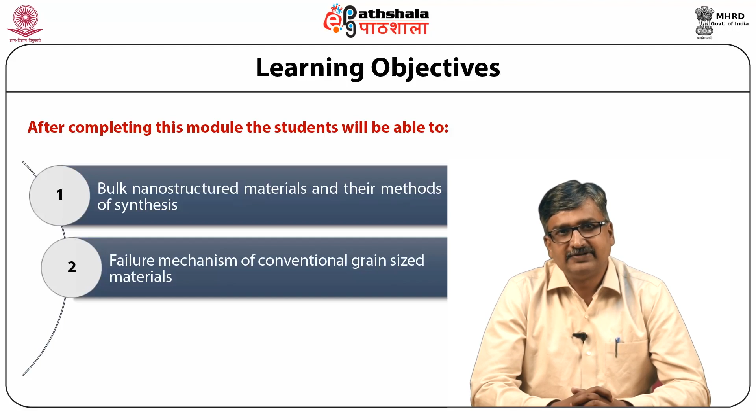Today we are going to discuss the module titled Basic Properties of Nanoparticles Part 7 under the paper Nanoscience and Technology 2. After completing this module, the student will be able to learn about bulk nanostructure material and their method of synthesis. You will also be able to learn the failure mechanism of conventional grain size material and the mechanical and electrical properties of bulk nanostructure material.

Bulk nanostructure material is defined as bulk solid with a nanoscale or partially nanoscale microstructure. This category of nanostructure material has historical roots going back many decades but has a relatively recent focus due to new discoveries of unique properties of some nanoscale materials.

Early in the century, when microstructure was revealed primarily with the optical microscope, it was recognized that refined microstructures, for example small grain size, often provide attractive properties such as increased strength and toughness in structural materials. A classic example of properties enhanced due to refined microstructure with features too small to resolve with the optical microscope was age hardening of aluminum alloys.

This phenomenon, discovered by Alfred Wilm in 1906, was essentially explained by Merica, Waltenberg and Scott in 1919, and by Mehl and Kohn in 1983. The microstructure features responsible were first inferred by X-ray study of Guinier and Preston in 1938. With the advent of transmission electron microscope and sophisticated X-ray diffraction methods, it is now known that fine precipitates responsible for age hardening in aluminum 4% copper alloy are, for example, clusters of copper atoms - Guinier-Preston (GP) zones - and the meta-stable partially coherent theta prime precipitate, which was studied by Silcock et al. in 1953-54, and by Cohen in 1992.

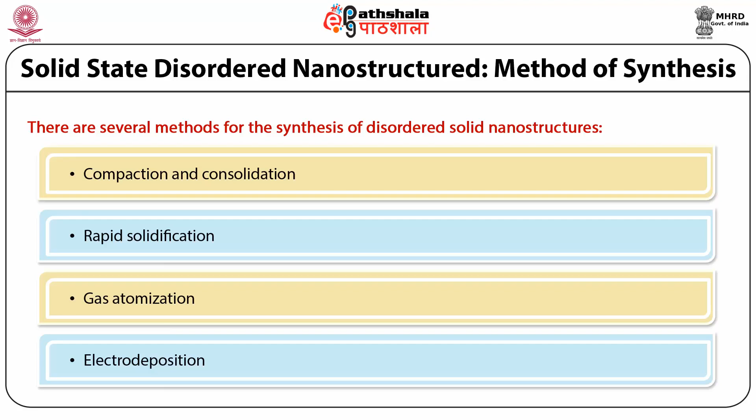The first one is compaction and consolidation. The second one is rapid solidification. The third one is gas atomization, and the fourth one is electrodeposition. These methods will be discussed one by one in the coming slides.

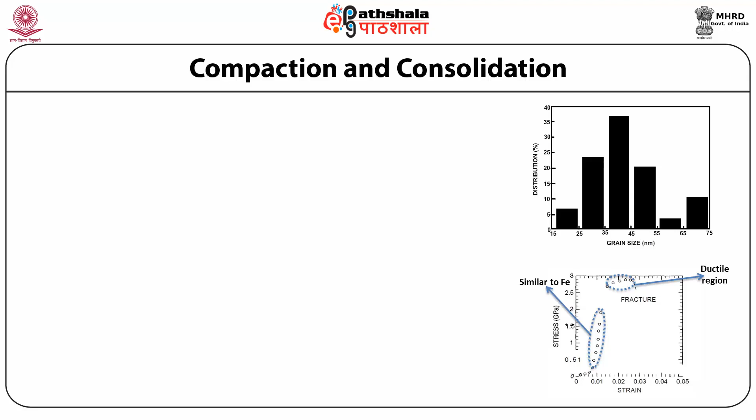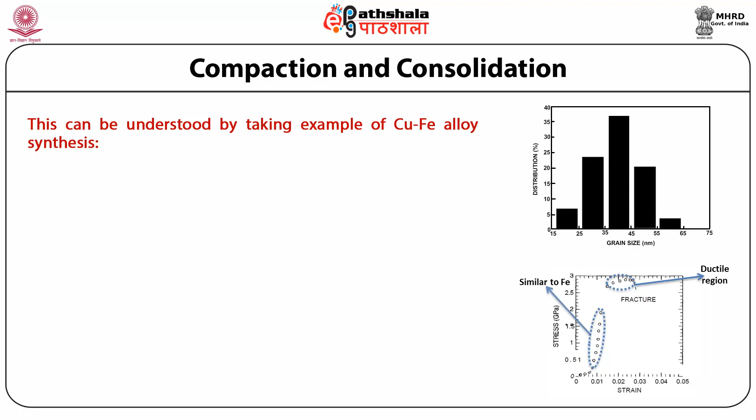Let us discuss the first method of synthesis, which is compaction and consolidation. Compaction and consolidation is one method for the synthesis of disordered bulk nanostructures. As an example of such a process, let us consider how nanostructure copper-iron alloys are made, using mixtures of iron and copper powder having the composition of your need.

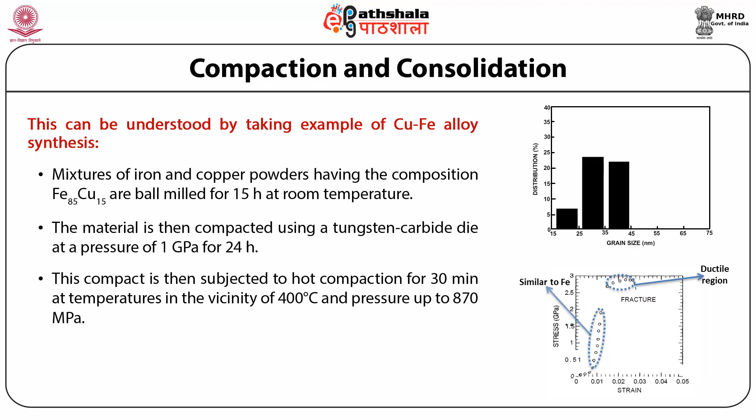For example, here it is: Fe85Cu15, ball milled. Ball milling is a technique done for 15 hours at room temperature. The material is then compacted using a tungsten carbide die at a pressure of 1 gigapascal for 24 hours. This compact is then subjected to hot compaction for 30 minutes at a temperature around 400 degrees Celsius and a pressure up to 870 megapascal. The final density of the compact is around 99% of the maximum possible density.

The figure presents the distribution of grain size in the material, showing that it consists of nanoparticles ranging in size from 20 to 70 nanometers, with the largest number of particles having a size of 40 nanometers.

The figure shows a stress-strain curve for this case. Its Young's modulus, which is the slope of the curve in the linear region, is similar to that of conventional iron. The deviation from linearity in the stress-strain curve shows there is a ductile region before fracture where the material displays elongation. The data shows that fracture occurs at 2.8 gigapascal, about 5 times the fracture stress of iron with larger grain size ranging from 50 to 150 micrometers.

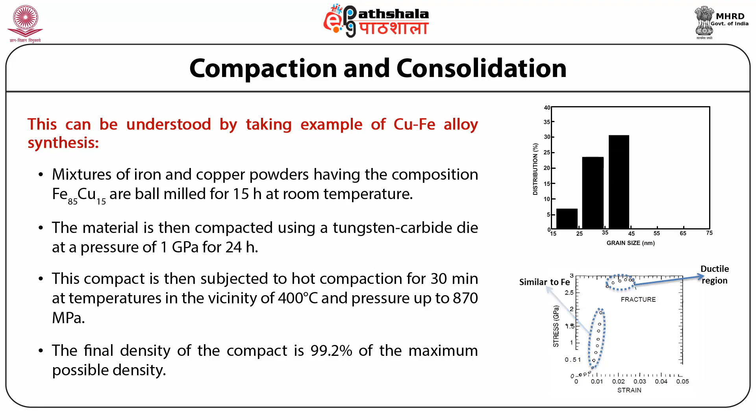Significant modification of mechanical properties of disordered bulk materials having nano-size grain is one of the most important properties of such materials. Making materials with nano-size grain has the potential to provide a significant increase in yield stress and has many useful applications, such as stronger material for automobile bodies.

The parameters that control the nanostructure of the material are nozzle size, nozzle-to-drum distance, melt ejection pressure, and spin rate of rotation of the metal drum.

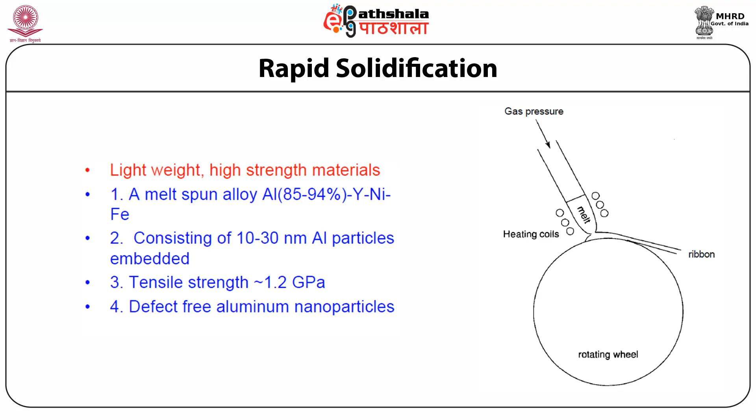The need for lightweight, high-strength material has led to the development of 85 to 94% aluminum alloys with other metals such as yttrium, nickel, and iron, made by this method. A melt-spun alloy of aluminum, yttrium, nickel, and iron, consisting of 10 to 30 nanometer aluminum particles embedded in an amorphous matrix, can have a tensile strength in excess of 1.2 gigapascal. This high value is attributed to the presence of defect-free aluminum nanoparticles.

Nanostructured material can also be made by electrodeposition. For example, a sheet of nanostructured copper can be fabricated by putting two electrodes in an electrolyte of copper sulfate and applying a voltage between them. A layer of nanostructured copper will be deposited on the negative titanium electrode. A sheet of copper a millimeter thick can be made by this process, having an average grain size of 27 nanometers and enhanced yield strength of 119 megapascal.

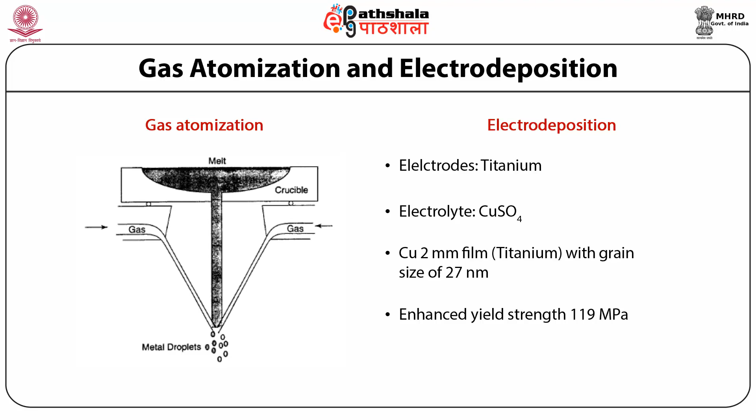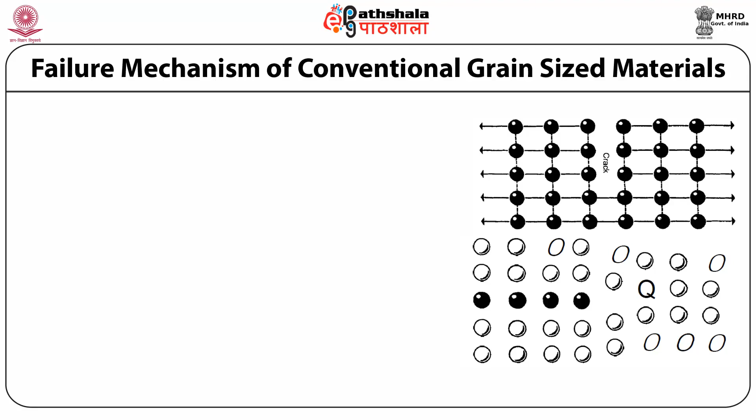The failure mechanism of conventional grain-sized material: in order to understand how nano-sized grains affect the bulk structure of materials, it is necessary to discuss how conventional grain-sized materials fail mechanically. A brittle material fractures before it undergoes irreversible elongation.

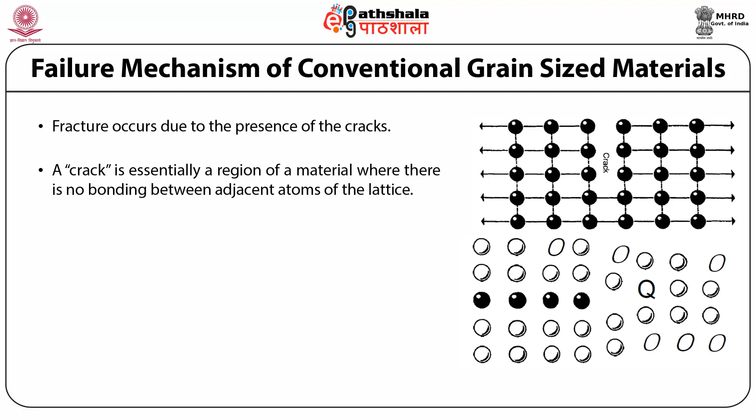Fracture occurs because of the existence of cracks in the material. The figure shows an example of a crack in a two-dimensional lattice. A crack is essentially a region of a material where there is no bonding between adjacent atoms of the lattice. If such a material is subjected to tension, the crack interrupts the flow of stress. The stress accumulates at the bond at the end of the crack, making the stress at that bond very high, perhaps exceeding the bond strength. This results in the breaking of the bond at the end of the crack and the lengthening of the crack.

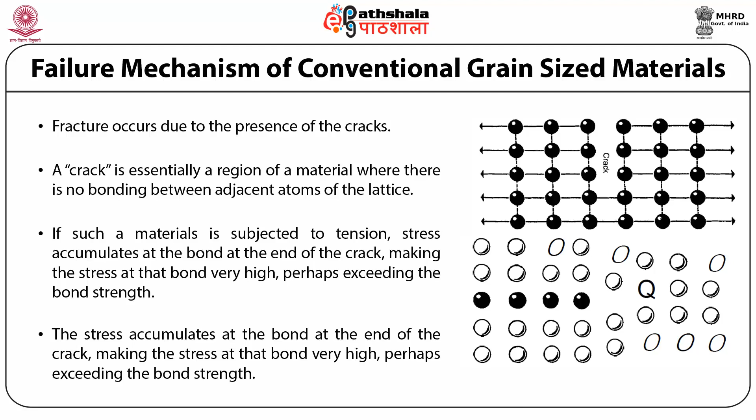Stress builds up on the next bond at the bottom of the crack, and it breaks. This process of crack propagation continues until eventually the material separates at the crack. A crack provides a mechanism whereby a weak external force can break strong bonds one by one.

In this region, the material is irreversibly elongated before fracture. When the stress is removed after the brittle to ductile transition, the material does not return to its original length.

The transition to ductile is a result of another kind of defect in the lattice called a dislocation. The figures illustrate an edge dislocation in a two-dimensional lattice. There are also other kinds of dislocation, such as screw dislocation.

Dislocations are essentially regions where lattice deviation from a regular structure extends over a large number of lattice spacings. Unlike cracks, the atoms in this region of the dislocation are bonded to each other, but the bonds are weaker than in the normal region.

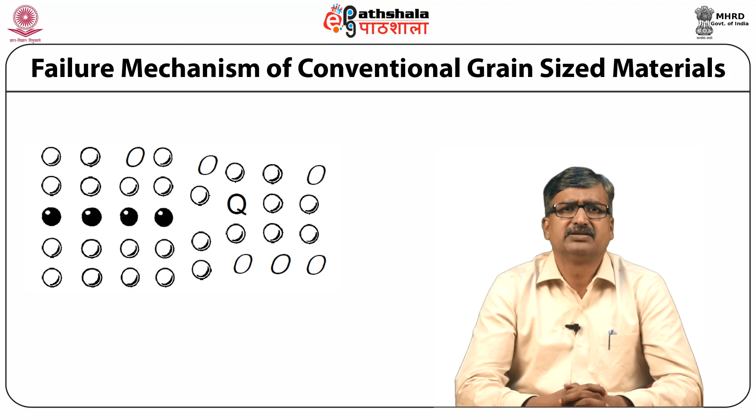Now let's discuss mechanical properties. The intrinsic elastic modulus of nanostructured material is essentially the same as that of the bulk material having micrometer-size grains, until the grain size becomes very small, less than 5 nanometers.

Young's modulus is the factor relating stress and strain. It is the slope of the stress-strain curve in the linear region. The larger the value of Young's modulus, the less elastic the material.

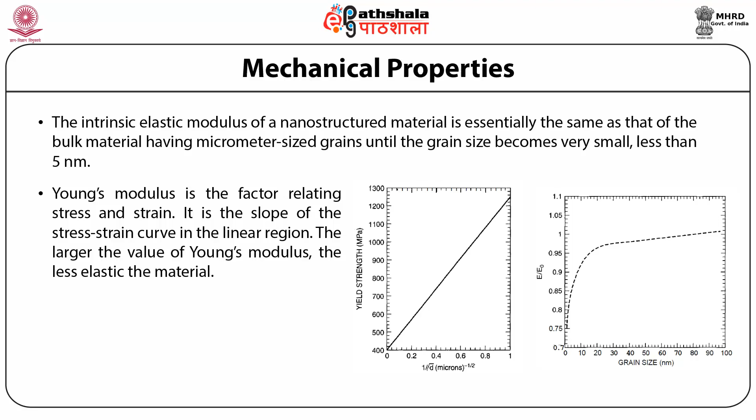In the figure, we plot the ratio of Young's modulus E in nano-grained iron to its value in conventional grain size iron, E0, as a function of grain size. We see from the figure that below 20 nanometers, Young's modulus begins to decrease from its value in conventional grain size material.

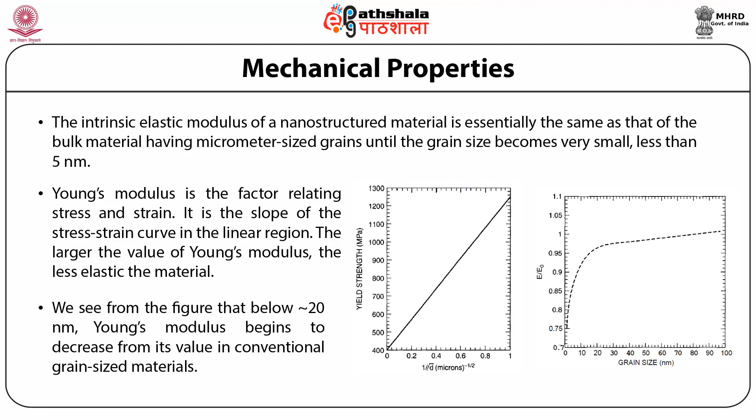The yield strength sigma_y of a conventional grain size material is related to the grain size by a Hall-Petch relation: sigma_y equals sigma_0 plus k times d to the power minus one half, where sigma_0 is the frictional stress opposing dislocation movement, k is a constant, and d is the grain size in micrometers.

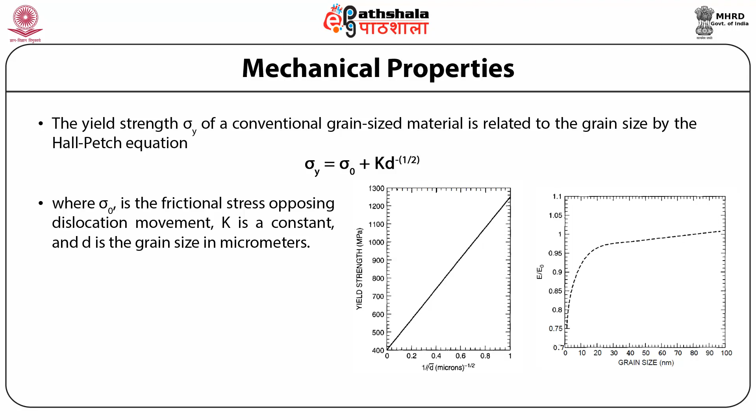Hardness can also be described by a similar equation. The figure plots the measured yield strength of an iron-cobalt alloy as a function of d to the power minus one half, showing the linear behavior predicted by the equation.

Assuming the equation is valid for nano-size grains, a bulk material having a 50 nanometer grain size would have a yield strength of around 4.14 gigapascals.

The reason for the increase in yield strength with smaller grain size is that material having smaller grains has more grain boundaries, blocking dislocation movement.

Deviations from Hall-Petch behavior have been observed for materials made of particles less than 20 nanometers in size. The deviation involves either no dependence on particle size (zero slope) or a decrease in yield strength with particle size (negative slope).

It is believed that conventional dislocation-based deformation is not possible in bulk nanostructured materials with size less than 30 nanometers, because mobile dislocations are unlikely to occur. Examination of small-grain bulk nanomaterials by transmission electron microscopy during deformation does not show any evidence for mobile dislocations.

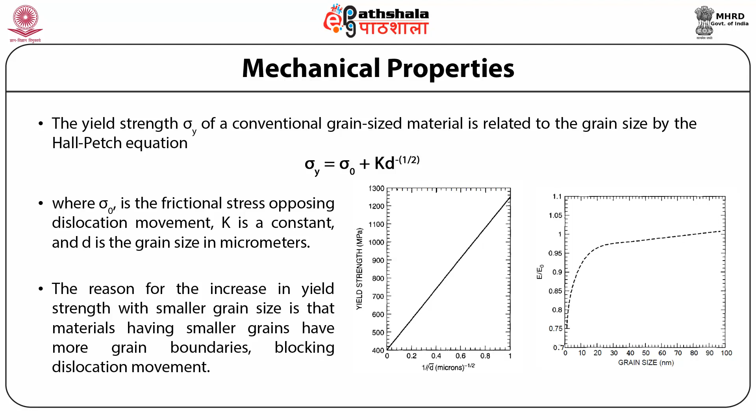Another kind of bulk nanostructure consists of periodic layers of nanomaterial of different thickness, such as alternating layers of TiN and NbN. These layered materials are fabricated by various vapor phase methods such as sputter deposition and chemical vapor phase deposition. They can also be made by electrochemical deposition, discussed earlier.

These materials have very large interface area densities, meaning the density of atoms on the planar boundary between two layers is very high. For example, a square centimeter of a 1 micrometer thick multilayer film with layers of 2 nanometer thickness has an interface area of 1000 centimeter square. Since the material has a density of about 6.5 gram per centimeter cube, the interface area density is 154 meter square per gram, comparable to that of a typical heterogeneous catalyst.

The interfacial regions have a strong influence on the properties of these materials. These layered materials have very high hardness, which depends on the thickness of the layer, and good wear resistance.

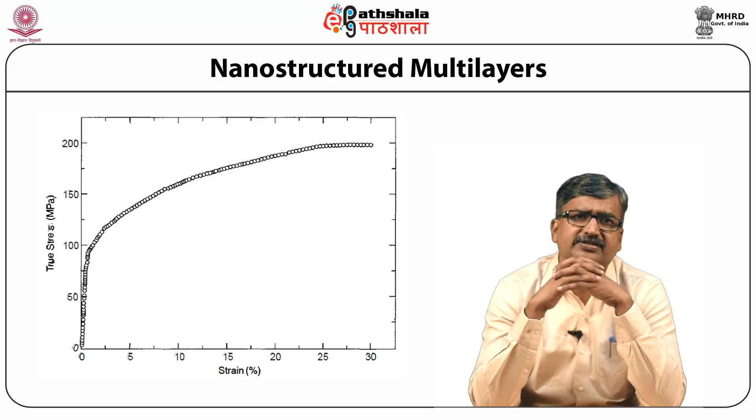Let us discuss the electrical properties in this case. For a collection of nanoparticles to be a conducting material, the particles must be in electrical contact. One form of bulk nanostructure material that is conducting consists of gold nanoparticles connected to each other by long molecules.

This network is made by taking gold nanoparticles in the form of an aerosol spray and subjecting them to a fine mist of thiol, such as dodecanethiol, RSH, where R is C12H25. These alkyl thiols have an end group SH that can attach to a metal, and a methylene chain 8 to 12 units long that provides steric repulsion between the chains. The chain-like molecules radiate out from the particle. The encapsulated gold particles are stable in aliphatic solvents such as hexane.

However, the addition of a small amount of dithiol to the solution causes the formation of a three-dimensional cluster network that precipitates out as a solid. Clusters of the particles can also be deposited on a flat surface once the colloidal solution of encapsulated nanoparticles has been formed. In-plane electronic conduction has been measured in a two-dimensional array of 5 nanometer gold nanoparticles connected or linked to each other by conjugated organic molecules.

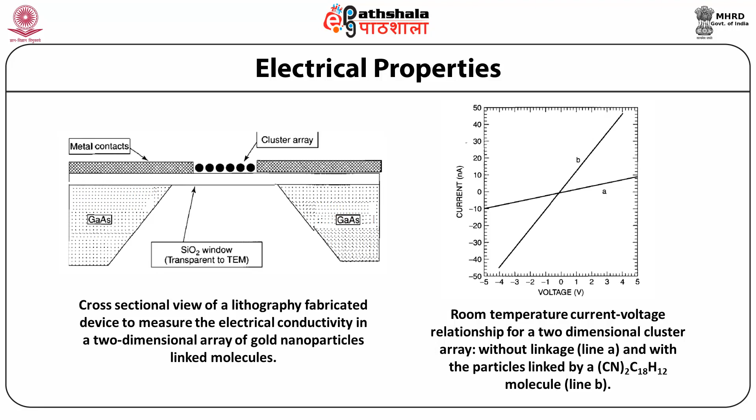The figure gives the result of measurement of linked clusters at a number of different temperatures. The conductance G, defined as the ratio of current to voltage, the reciprocal of resistance R, is G equals I by V equals 1 by R. The data shows that linking the gold nanoparticles substantially increases the conductance.

The temperature dependence of the low voltage conductance is given by G equals G naught times exponential of minus E by kT, where E is the activation energy. The conduction process for this system can be modeled by a hexagonal array of single crystal gold clusters linked by resistors, which are the connecting molecules, as illustrated in the figure.

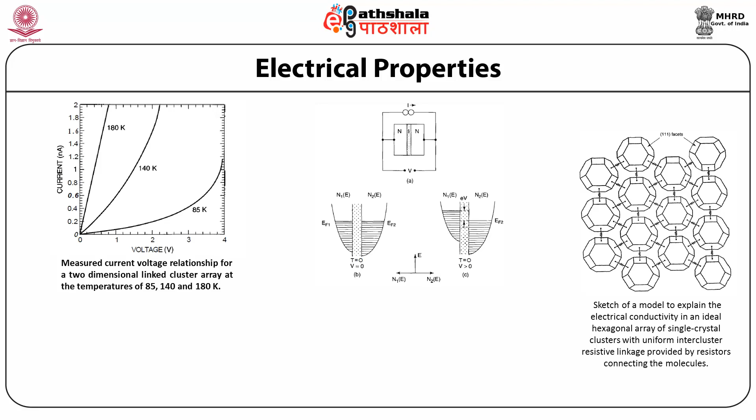The mechanism of conduction is electron tunneling. Tunneling is a quantum mechanical phenomenon where an electron can pass through an energy barrier larger than the kinetic energy of the electron.

If a sandwich is constructed consisting of two similar metals separated by a thin insulating material, as shown in the figure, under certain conditions an electron can pass from one metal to another. For the electron to tunnel from one side to the other junction, there must be an available unoccupied electronic state on the other side. For two identical metals at T equal to 0 K, the Fermi energy will be at the same level and there will be no state available, so in this figure tunneling cannot occur.

The application of a voltage across the junction increases the electronic energy of one metal with respect to the other, by shifting one Fermi level relative to the other.

The number of electrons that can be moved across the junction from left to right in an energy interval dE is proportional to the number of occupied states on the left and the number of unoccupied states on the right, given by N1(E) times F(E) times N2(E) times [1 minus F(E)], where N1 is the density of states in metal 1, N2 is the density of states in metal 2, and F(E) is the Fermi-Dirac distribution of states over energy, which is plotted in the figure.

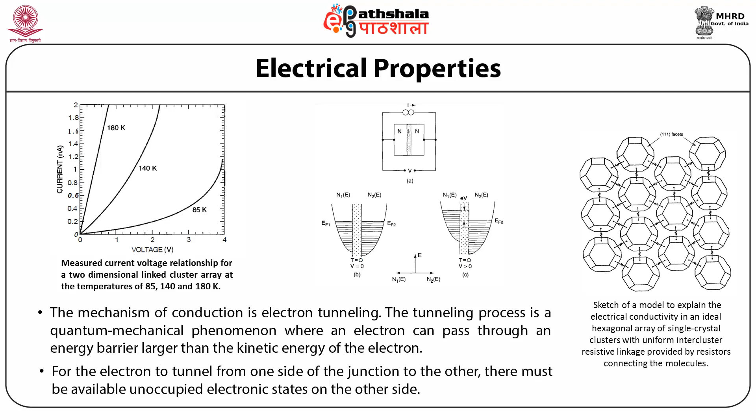If the density of states is assumed constant over an energy range eV, then for small V and low T we obtain I equals K N1(EF) N2(EF) eV, which can be rewritten as I equals Gnn V, where Gnn is K N1(EF) N2(EF) e, and is defined as the conductance. The junction in effect behaves in an ohmic manner, that is, with the current proportional to the voltage.

So students, let us now summarize what we have learned in this module, point by point. There are several synthesis methods of disordered solid nanostructures: compaction and consolidation, rapid solidification, gas atomization, and electrodeposition. There is a failure mechanism of conventional grain size material, mainly governed by cracks and dislocations. A crack is essentially a region of material where there is no bonding between adjacent atoms of the lattice. Dislocations are essentially regions where the lattice deviates from the regular structure, extending over a large number of lattice spacings.

For a nanostructured material, yield strength increases. The reason is that material having smaller grains have more grain boundaries blocking dislocation movement. Nanostructured multilayers have a layered structure, and these layered materials have high hardness, which depends on the thickness of the layers, and good wear resistance.

The mechanism of conduction in disordered solid nanostructures is electron tunneling. The tunneling process is a quantum mechanical phenomenon where an electron can pass through an energy barrier larger than the kinetic energy of the electron.